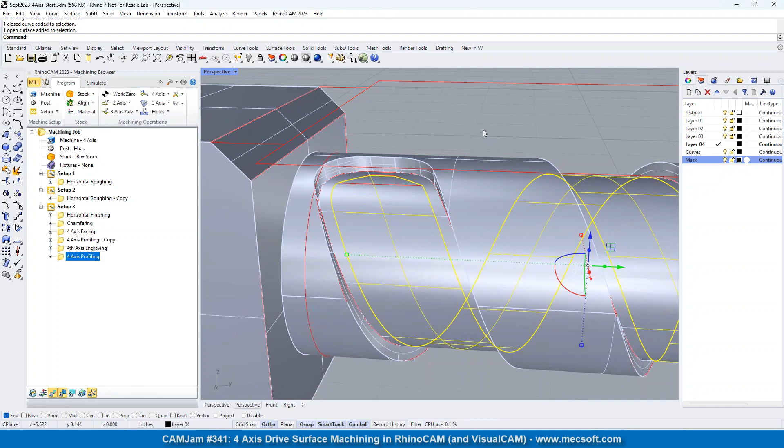So the reason that we created this surface is that we don't want to go all the way to this edge, because we're going to use a 4-axis profiling operation to clean that edge perfectly. So we're going to use drive surface machining, 4-axis. So we want it to only go to a certain distance away from the part.

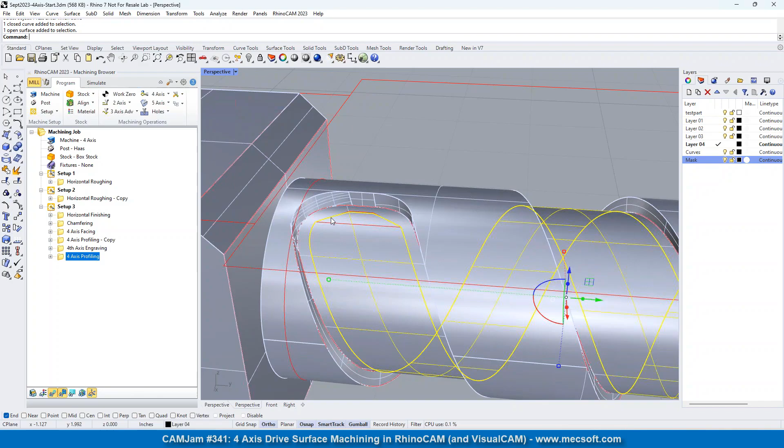Typically it could be the tool radius, but not less or not more than the tool diameter. So we've got approximately the tool radius here, and we just rough that in up there. It doesn't really matter what that shape is, as long as you're not on the curve, and also that you're backed up enough so you can get a clean up with that profile. And it's the same on this other side over here.

Okay. So quick note about this method. I did mention all the other 4-axis methods that we have in the expert configuration. If you use that drop down on 4-axis, those are all the different methods we have in the expert configuration. And if you notice, drive surface is the last operation.

This is really the only operation that we have that really is true 4-axis, in the sense it's not a wrap operation. So we're not taking one of the linear axes, in this case the y-axis, and converting that to a rotary. And in drive surface, all 3 axes plus the rotary axis also will change. And the way we do that is basically taking the drive surface,

and I'm sorry, I have to correct myself. Even in drive surface machining, one of the linear axes is mapped to a rotary axis, but the way we define the drive geometry is different. It's not projecting onto that cylinder or rotary axis. We actually have to create a drive surface, and we're using the ISO lines of the drive surface to create the toolpath. So that's what Don's going to be showing now.

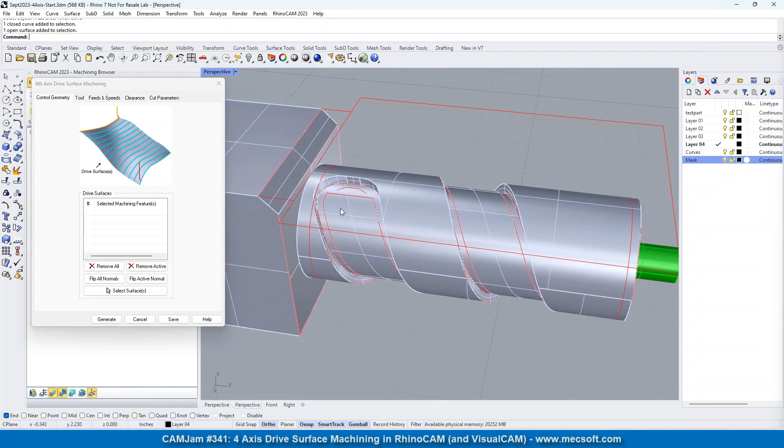Okay, so while this is up, we're going to go ahead and pick drive surface and get this up on my other screen here. So for the surface, as I mentioned, let's go ahead and use select surface. And I'm going to pick the surface here that I created. It's actually on the final finished surface. It's just not extended all the way out to the edge.

So we've got that surface selected, and let's go ahead and pick our tool. We'll use the 188. Okay, and we'll go look at our cut parameters here. So we've got 0.001 tolerance, a stock of 0. This is a finished cut, and we're going to go across. So the tool is going to wrap around similar to that facing operation, but it's going to stop within the perimeters of this surface.

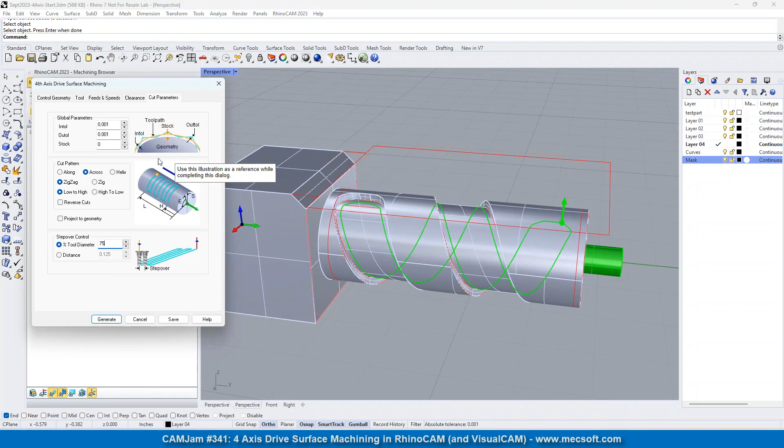Okay, and then also we're going to go low to high. That's fine, and we'll increase this to 75%. And let's go ahead and run that. Okay, so that was pretty fast. So the tool is going around the axis like this. Let's go ahead and simulate that.

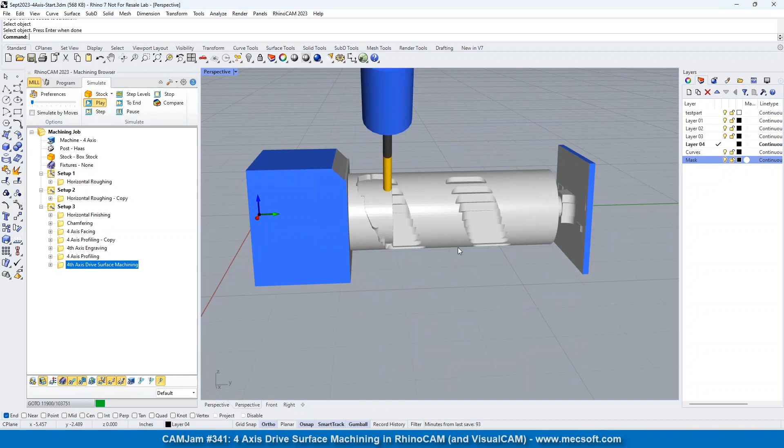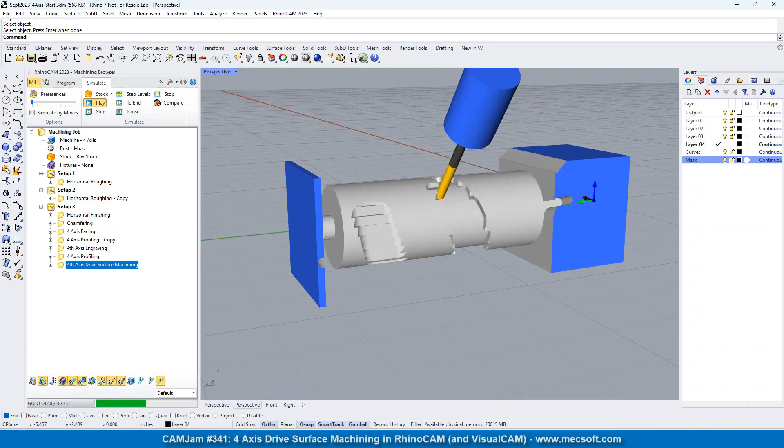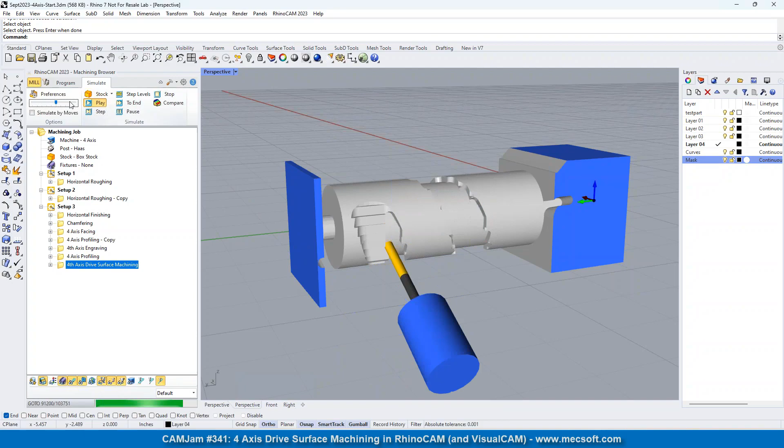So the tool is on the bottom of that pocket, and the center of the tool is stopping at the edge of the surface, or the perimeter of the surface. So basically, we're finishing it on the cylinder, but we're roughing it on the side walls. You can think of it that way. Okay.